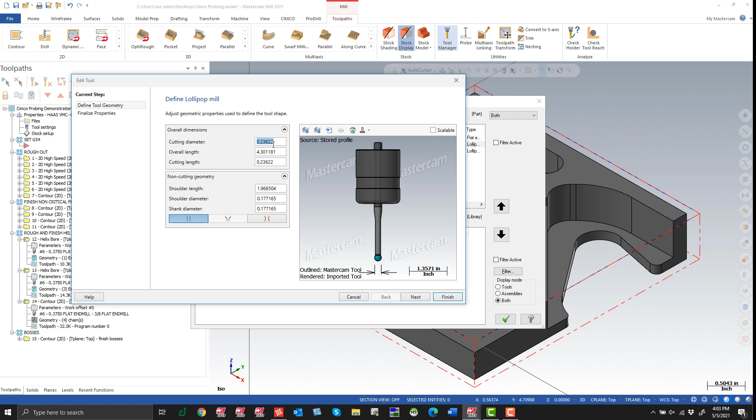Cimco Probing allows the user to define a probe in Mastercam based off your exact specifications of your own probe. We do this by defining a lollipop mill in Mastercam and setting it as a static tool. We'll go over a quick example in our Toolpath tab. We'll go into our Tool Manager, and we can see that I have a Renishaw OMP 40 probe defined. If I right click and say Edit Tool, you can see I have all the parameters set for the profile of our probe. You can then go into Finalize Properties, make sure the tool number and length and diameter offset looks good, and go into Spindle Direction, and we can see that is set to static.

So at this point, we're ready to probe in Cimco Probing. We'll look at an example of setting a G54 offset right off the bat. Inside of our Cimco tab, you'll see our two C-hooks here, and we're going to go into Cimco Probing. You'll see we have three different options: workpiece alignment, workpiece datum, and workpiece inspection. For our example with setting any work offsets, we'll go into workpiece datum, and we'll use the rectangle outside path.

You'll see the probe that we looked at before is going to be in our list. We'll make sure we select that before we go into our cycle tab, and then right click for selection. I'll right click and look at the three examples that we have: from stock, select lines, and select chain. I have a piece of wireframe going around the top of our stock here, so we could technically go off of a chain, but we'll use from stock for this example. So we'll select this, make sure our plane looks right, say OK. And you can see that Cimco Probing will automatically use the extents of my stock that I set up in Mastercam to generate that path right off the bat.

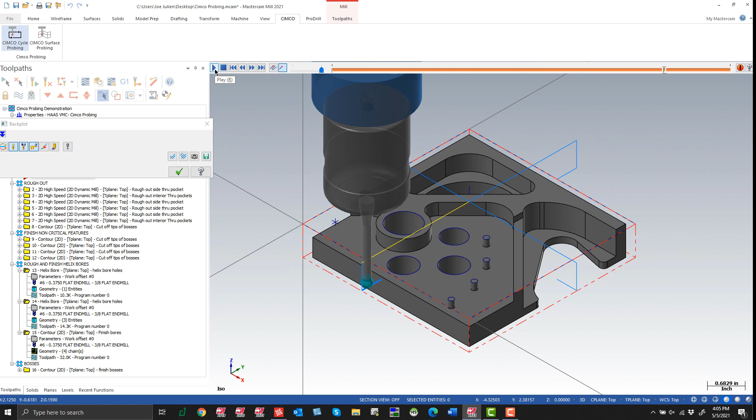So we can go ahead and then create or adjust our safety or clearance height here, but it looks like we're in good shape. Our part's fixtured at Z0, so we should be good to go at this point. I'm going to check mark, and then we look at our toolpath here. After a quick back plot, we can see that we're touching off on each side of our part and then updating G54 at that point.

We'll then go, after we set our X and Y here, we'll go in and say workpiece datum once more and then say point one axis. This is going to be setting our Z height. Making sure we select our probe, we'll go into our cycle tab, right click and select the point. Go ahead and select this point, say OK for the plane, and then adjust my clearance height as need be.

So I'm going to just manually raise this, and you can see that these values are moving inside of here. What's nice about Cimco Probing is you can actually scroll your mouse wheel inside of the window here, and it'll adjust your value that you have in the window. So I'm going to add in a safety distance here as well. The yellow is going to be where we rapid into, and then the blue is going to be where we start feeding, just like you might be used to in Mastercam.

And we can see here that our work offset that we are updating is G54. If you are using any of the extendeds, we have those available as well. So at this point, we can say OK. And then within just a few clicks, we've got all three axes of our 3-axis setup set with our probe in Cimco Probing. Now that we've had our X, Y, and Z set, Cimco Probing will actually allow us to clock in a 4th or 5th axis if your machine supports multi-axis. However, we will go over that in a future video.

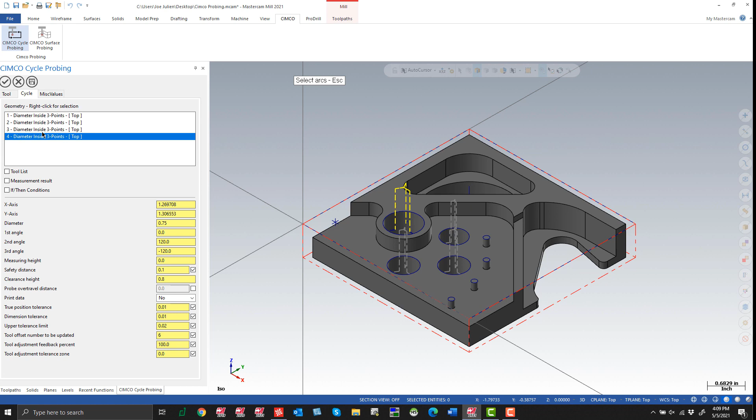For this example, we'll just take a look at this top point here, just for time's sake. So if we zoom in a bit, and maybe go into a top view, you can see that we are touching off in 3 points, and it's pretty much sorted out by each angle.

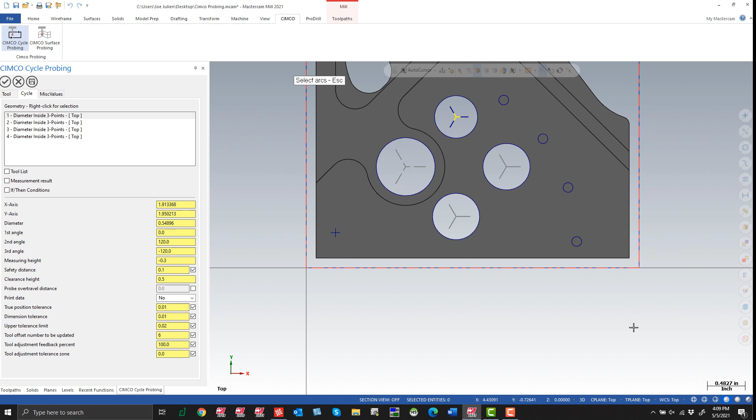So what we can do, if we need to avoid any fixturing or any chips, anything like that, is edit that angle. Let's say I wanted to go to like 180 for some reason, we have that opportunity to do that. But for this example, we'll keep it at 120.

So in the measuring height, it's going to go down 300 thousandths. And we are going to be updating the tolerance as well.

So when we're getting into the remachining side of things, we're going to want to check this box for our if-then conditions. And then Cimco Probing is going to give us 3 options: one for scrap, one for remachining, and one within our tolerance here.

So if the part's scrapped and we check that on the probe and it's verifying that, then we're not going to waste any more time with any machining, so we'll just go to the program end at that point.

If we're going to be remachining something, then let's say if we're a bit undersized, we can go to a specific operation in our list.

So I can then choose my operation based off of the toolpaths that I have in Mastercam already. If we take a look at this, our first operation is going to be op 14 here. So we'll go into here. Operation 14 is going to be the start of our toolpath group.

And then if it's within the tolerance that we expect, then we're just going to continue on with that program.

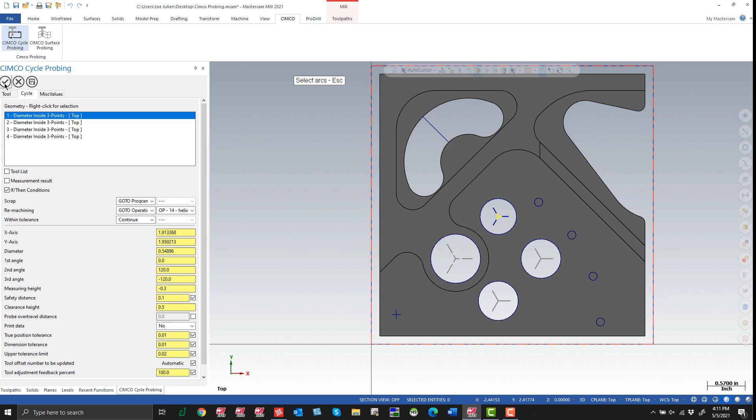For time and example's sake, we'll say OK to this. And we've got our toolpath here. So after a quick back plot...

Let's maybe slow that down a bit. It's going to be doing our final hole here. And then that's our path here.

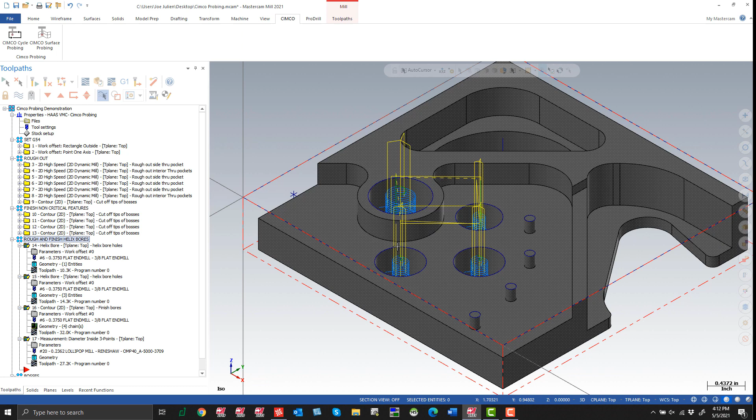So once we post everything out with this, the logic is completely built into the program already. So we can say G1. I'm not going to post out everything quite yet. But then we see that it opens up direct in our Cimco editor here.

So our label at the top, we have something called a restart label here, which is going to, once we do our checks with the probe, if it finds out that we do need to remachine that, we'll update our tool offset and begin that program again.

So using Cimco Probing can efficiently streamline your usage of your probe, run and check long automated part runs, and eliminate wasted time machining a part that ends up being scrapped in the long run.